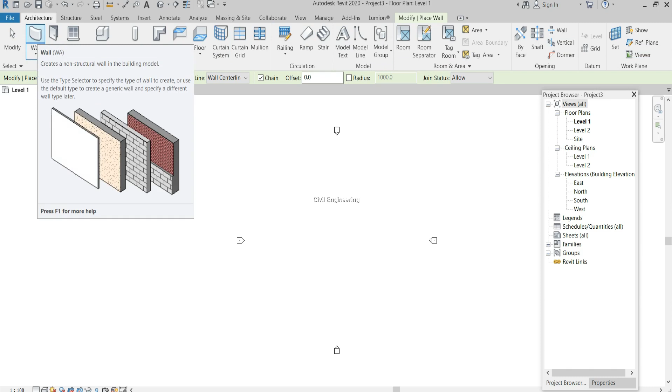Now I am going to create a new wall here. To create anything architectural, we have to click the Architecture tab. Under that there are many tools which we can use for our model. First I select this wall tool. By using the wall tool, I can create a wall in Revit. First I click on the wall tool. There are a few options too, which I will explain later. First I click on this wall and create one.

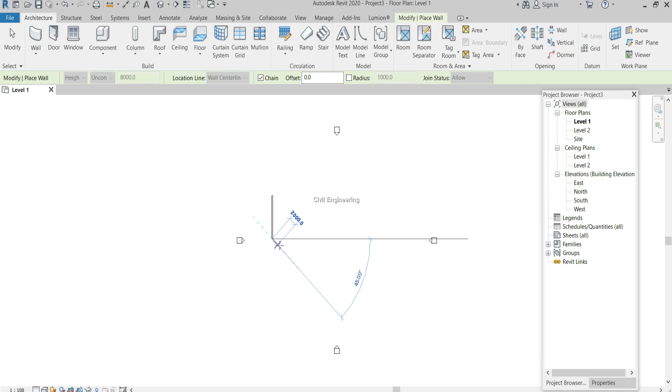I will click the escape button to escape from that tool. When I click on this, you can see it shows 10,000, but we cannot identify what unit this is. For that, we have to check the units, or if the units are not the type we prefer, we can change the unit type too.

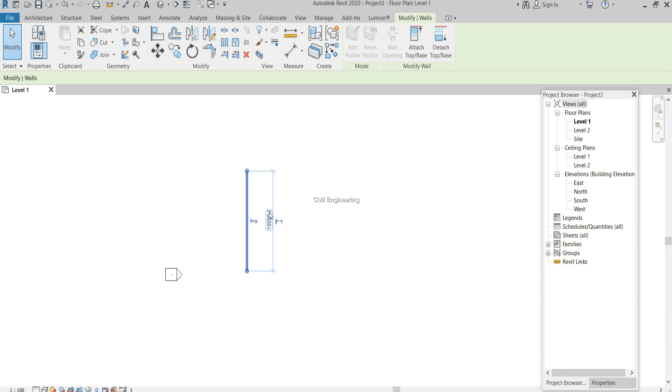To change or check the unit type, we have to enter the Manage tab. In the Manage tab, under the Settings panel, we can see the Project Units tool. Sometimes these words cannot be seen in some versions, only the symbol will be seen. But in 2020, I can see this described with words as Project Units. I will left click on this Project Units tool.

When I click on the project units tool, this pop-up window appears. Here you can see a table with two columns. The first column header is Units and the second is Format. You can see that length is in millimeters.

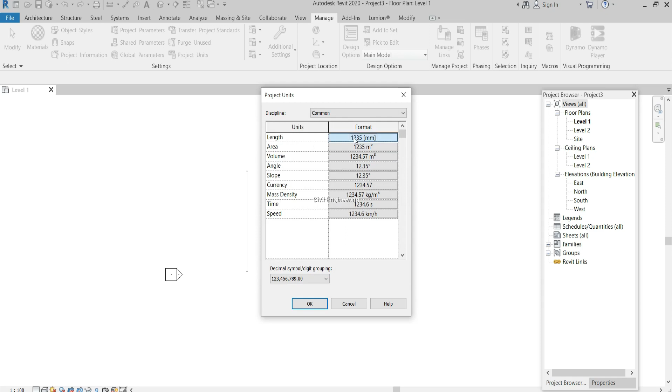If I click on this format button, under the length option you can see units are in millimeters, and we can use any of these types of units for our model.

This is about rounding. For 0 decimal places, if needed, we can round up to the nearest 10, nearest 100, or nearest 1000, or otherwise get our values with 1, 2, 3 decimal places, or any other custom decimal places.

If you need, you can get the units displayed after the numbers. If so, we can identify exactly what unit we are using. Okay, first I will change only this unit from millimeters into feet.

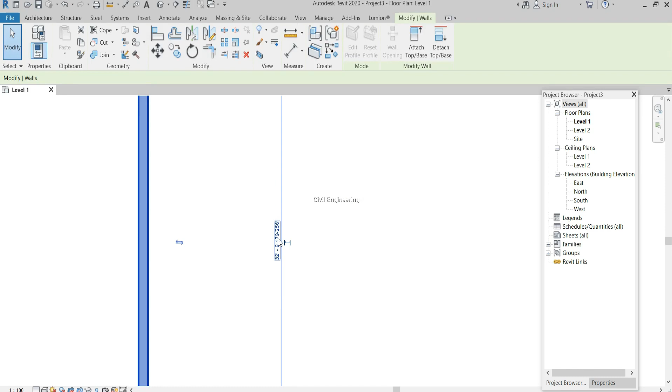Let's check. Now click on that wall. The units are now in feet and inches. You can see it: 32 feet, 9 and some fraction of inches.

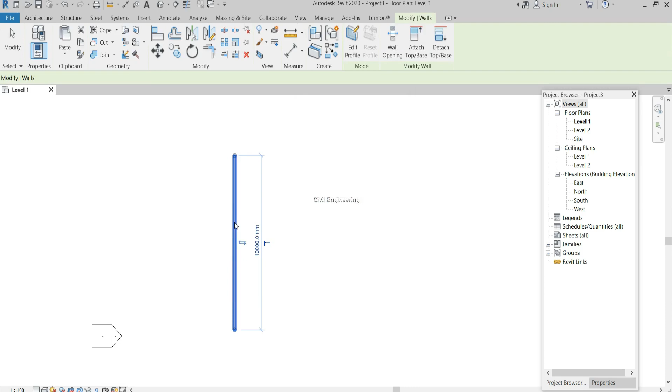Okay, I will go to the Project Units tool again in Manage. I will change it back to millimeters and set the units as millimeter. Now you can see that this 10,000 is with the millimeter unit.

In our first case, there was no unit to identify what we were using, but here you can see the millimeter unit, and we can exactly identify the unit as millimeters.

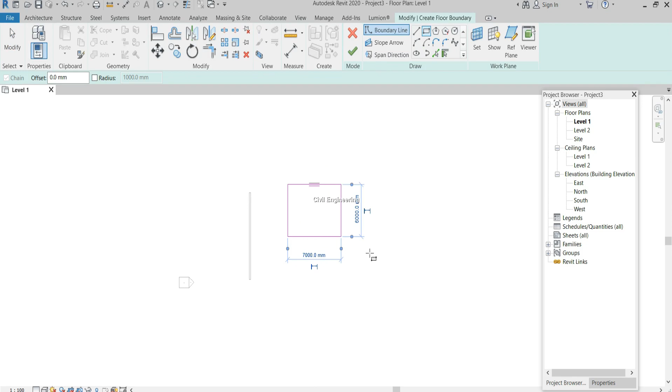Okay, I will create a floor here. This is only to identify the units. I will explain all of this in later videos. Let's proceed, and I will click the escape button to escape from the tool.

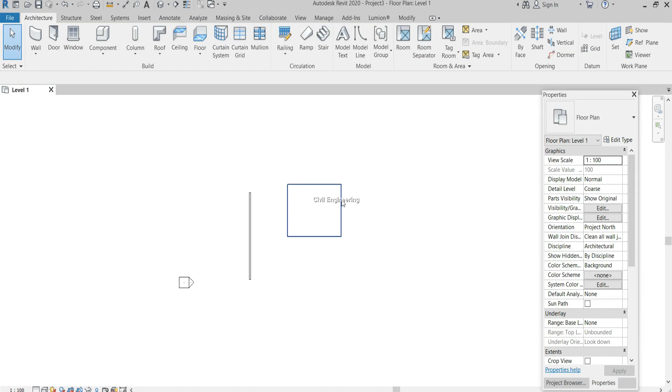When I click on this floor and go to the Properties window, this is the Properties palette, and here you can see every data of this floor. The properties palette changes when I click on this floor. The perimeter is 26,000 millimeters, area is 42.00 square meters, and volume is like this.

If I need to get this area in square feet, we can change it in the Manage tab, Project Units, for this area, into square feet. I use this unit symbol as the square feet symbol here.

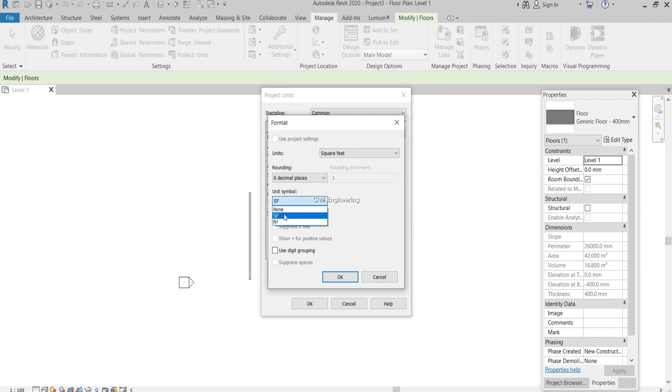Then you can identify and see the area is now in square feet unit: 452.08 square feet. Like that, you can change project units for volume, angle, slope, currency, mass density, time, or speed.

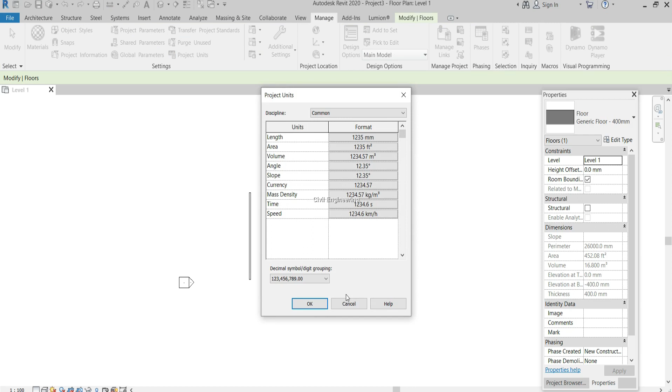Let's go to the project browser window and click on one of the elevations. You can see that Level 1 is at 0 mm height and Level 2 is at 4000 mm height.

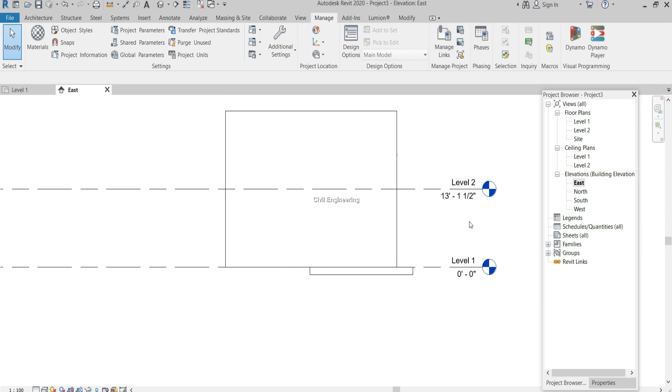If I need to get it in feet, we can change that length unit into feet and fractional inches. Now you can see it's 13 feet 1.5 inches. Like that, we can change the units into a desirable unit and use it in our projects.